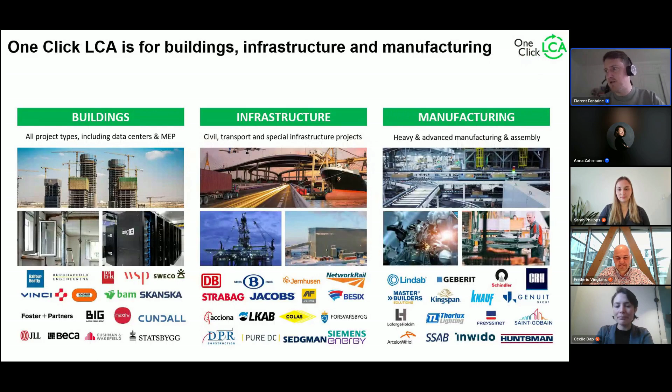So a few words about OneClick LCA. You should probably have heard about it, but we are a software company. We're focusing on building infrastructure and manufacturing LCA. We serve different types of customers across the industry. And the reason why we're here today is that life cycle assessment is getting traction all around Europe and the world.

To assess building environmental footprints, the main different drivers and reasons why to perform building LCA nowadays are basically regulations, certifications, and also buyer demands. We see in Europe in the coming years the EPBD, which will require performing building LCA for buildings larger than 1,000 square meters by 2028. This will be accompanied by regulations around product EPDs, but we also see a major increase in terms of certification and green certification schemes across the building industry. And LCBI, the Low Carbon Building Initiative, is one big initiative in Europe about it, and we'll speak about that today.

So how we basically at OneClick focus on measurement and improvement of sustainability on your project is that we deliver tools and software to assess environmental impact, carbon footprint at the different design stages of your buildings. I will not go into much more detail at the moment, but you can contact us if you want more information.

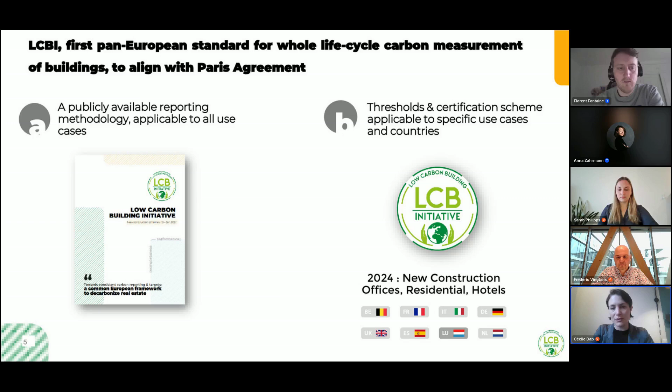So maybe in a few slides now, I'm going to go a bit into details on technically how the LCBI methodology works before letting the BPI team explain how they used LCBI. So globally, LCBI remains a carbon accounting methodology that we decided to base on 3 major criteria, linked with major European frameworks and standards that are being used. The 3 criteria are the following: we measure carbon footprint on embodied carbon, operational carbon, and biogenic carbon.

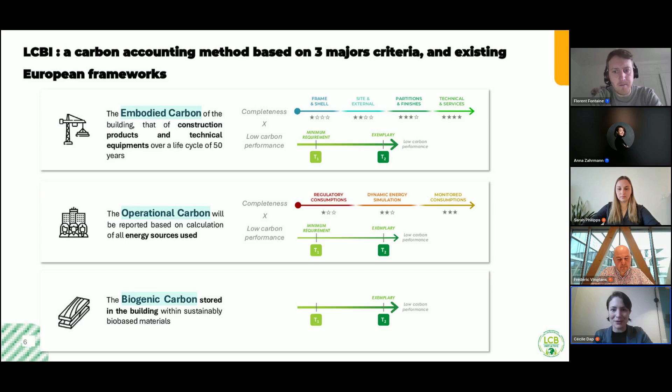Yes, so going further, and globally, as I was explaining, as much as possible during our work, we tried to align with existing standards and frameworks to make LCBI a support for real estate stakeholders to prepare before regulatory changes, and also to drive investment to low carbon buildings.

So on one side, we align with the taxonomy and the future EPBD requirements, for those who know them, because we are based mostly on the Level(s) reporting model, a reporting scheme from the European Commission. And then what we built has also been built in order to be able to use it as reporting data within the company for ESG reporting. So all the carbon footprint that you will be accounting through LCBI can be used internally as reporting data, and some companies are already using LCBI as a reporting scheme internally.

And in the end, the goal of LCBI, of course, is also, as you will be able to see, to highlight low carbon projects and to drive comparison of carbon footprint between projects, and thus drive investments to those projects that have the lowest carbon footprint.

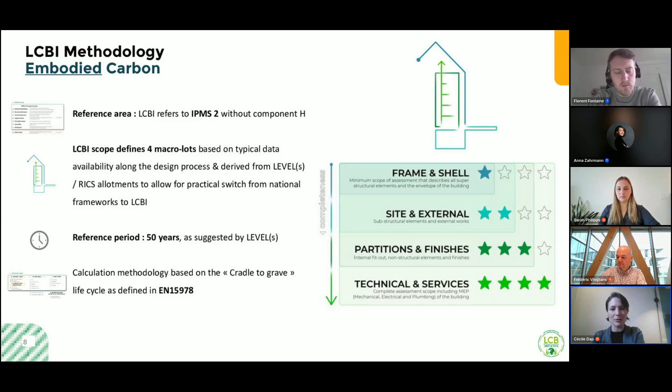So very briefly, maybe some details on each of the criteria. So on embodied carbon, maybe what's very specific about LCBI is that we defined 4 macro lots that you can see on the right, based on typical data availability along the project, and mostly based on the Level(s) and RICS reporting schemes. And this has been embedded into LCBI in order to allow for a very practical switch and bridge between national frameworks and LCBI. So this 4 stars allotment will be used during the LCBI reporting on the embodied carbon. Then we have also based it on the 50 years reference period, but you'll be able to see that later on.

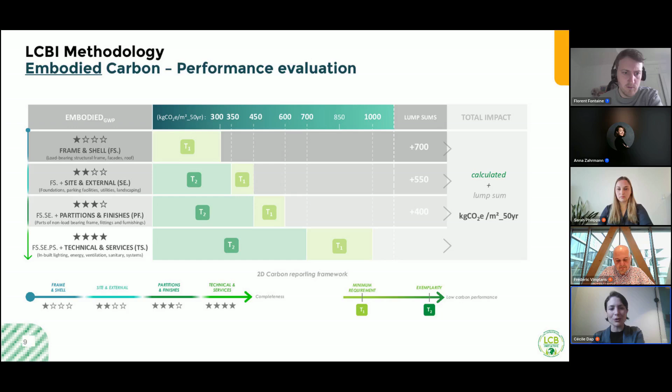Then the same kind of work on the operational carbon. We define several levels of preciseness to measure the final energy consumptions reported in kilowatt-hours. And then we use the emission factors proposed by CRREM to multiply those energy consumptions and get to a carbon footprint. So we have also different levels of preciseness as explained earlier.

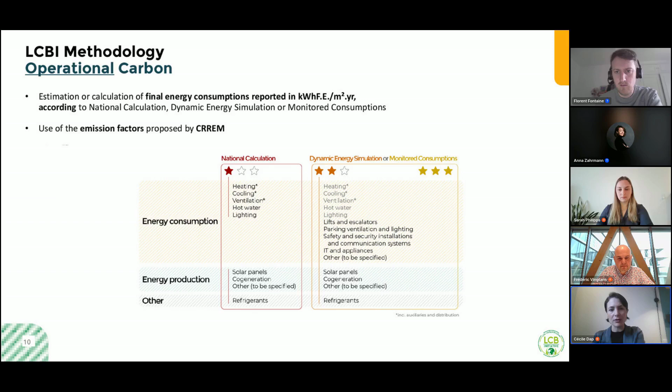And very briefly, carbon thresholds have been defined specifically for groups of countries, because in Europe, all countries don't have the same energy grid, and so have different emission factors. So this is why we have different thresholds in Europe. And last thing about those thresholds, they have been defined to be aligned with the CRREM pathways. So if you reach the LCBI thresholds on operational carbon, your assets should be aligned with the CRREM pathways.

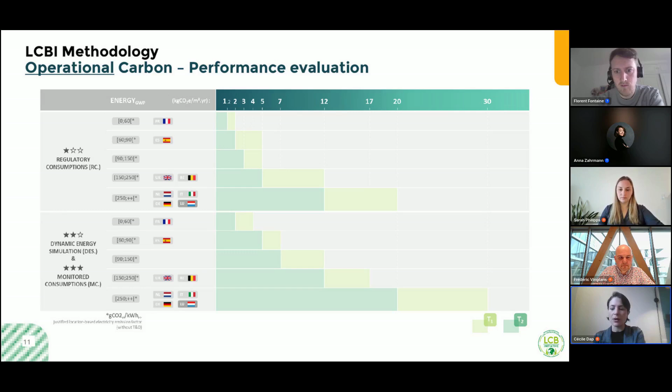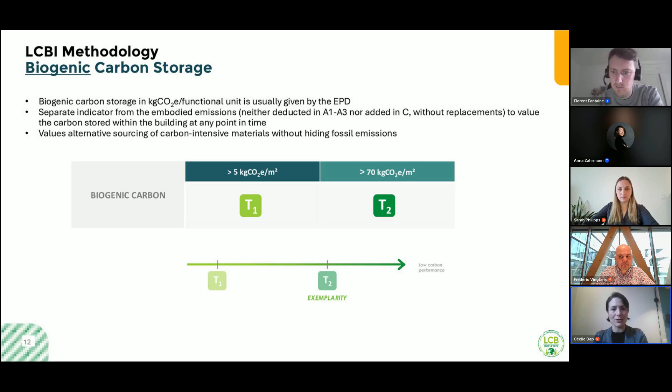And lastly, we also decided to value carbon storage in our buildings, because some buildings can also store some carbon according to the use of materials. So we have defined 2 levels of performance that you can reach in terms of carbon storage within your assets. And in the end, this combination of completeness and thresholds will give you access to different levels of the LCBI: standard, performance, or excellent certification. And this is what we will be able to see now with the Roots project, which has been our first certified building in Luxembourg, and also the first to reach the best level, excellent.

Thanks a lot, Cécile. Very, very insightful presentation, and I think all experts would agree that LCBI makes an outstanding work by associating the completeness and low carbon building performance, and also very clear and transparent how you make LCBI basically adapted to every country. So I think that was very insightful.

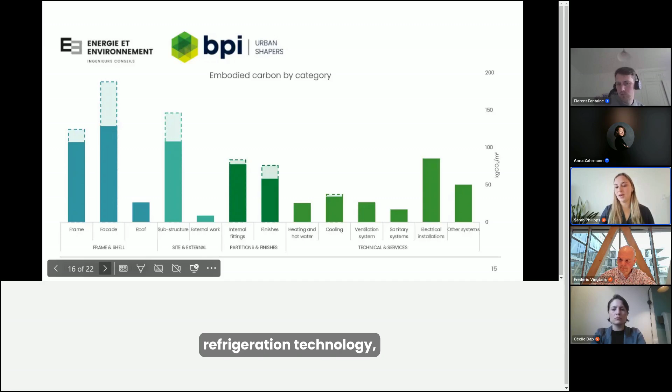Mais avant d'arriver à ça, pour le bâtiment, on était plus haut. Donc, en fait, on a vraiment fait des optimisations. Et comme le disait Frédéric, ces optimisations ont été faites en collaboration avec toutes les parties prenantes. Je vais rentrer un peu plus dans le détail, reprendre aussi des éléments que Frédéric a expliqué, voir concrètement comment ça se traduit au niveau des résultats. Donc, là, on voit les différentes optimisations sur les différents postes : structure, façade, sous-structure, les parachèvements intérieurs et également la technique avec le froid, mais on va y revenir.

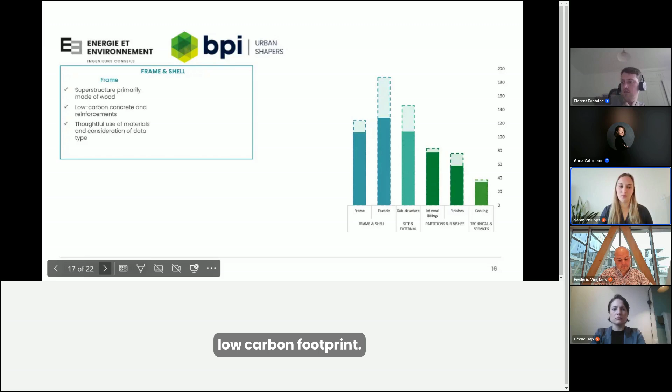Si je reprends tous ces éléments qui ont été optimisés et si on regarde point par point concrètement ce qui a été appliqué, on voit déjà que pour la partie superstructure et façade, la superstructure de base, ce n'est pas une optimisation mais un avantage du projet dès le départ. La superstructure est majoritairement constituée de bois. Et pour tous les éléments qui sont en béton armé, on est parti sur du béton à faible empreinte carbone et des armatures également à plus faible empreinte carbone. Un principe général, pas que sur la structure mais sur tout le projet, c'est vraiment l'usage raisonné des matériaux.

Donc, forcément, la diminution de l'empreinte carbone d'un bâtiment commence déjà par la diminution des quantités de matière. Il y a vraiment eu une réflexion qui a été faite tout au long du projet avec Frédéric et toutes les parties prenantes sur un usage raisonné des matériaux. On va le voir plus tard et Frédéric l'a déjà introduit avec les pieux.

Par rapport aux façades, de la même manière, il y a eu une réflexion, dont Frédéric a parlé, sur le ratio vitré. On avait une imposition, donc on est allé vraiment à la limite de cette imposition, mais justement en se rendant compte du poids des menuiseries et de l'impact sur tous les aspects d'avoir des façades vitrées. Il y a eu des enseignements qui ont été tirés pour chaque catégorie.

Et puis pour les profilés aluminium, on est parti sur des profilés en aluminium recyclé. Le fait d'avoir vraiment toutes les parties prenantes autour de la table, d'avoir l'entreprise, ça a permis d'avoir des retours directs sur la disponibilité des matériaux, sur les données disponibles avec les déclarations environnementales.

Pareil pour les protections solaires extérieures des menuiseries du projet : celles qui ont été sélectionnées disposeront d'une EPD. Cette collaboration nous a permis de nous renseigner sur la faisabilité, la disponibilité. Et sur les ancrages, il y a eu aussi un travail de réflexion sur la diminution des ancrages de bardage, pour avoir l'empreinte carbone la plus faible possible pour ce poste-là.

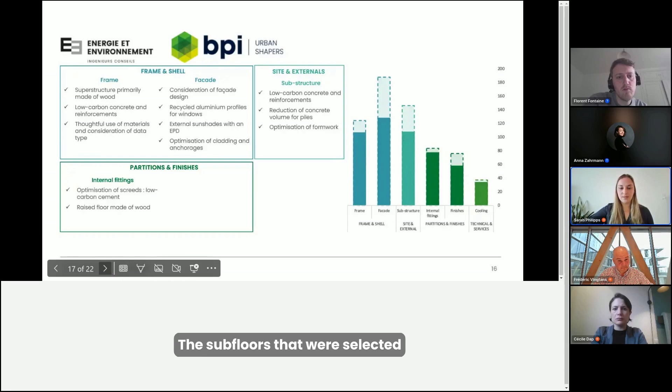Ensuite, pour la partie parachèvement, il y a une optimisation sur les chapes avec du ciment moins carboné. Les faux planchers sélectionnés sont des faux planchers bois agglomérés, plutôt qu'un standard qui serait plus en silicate. Il y a eu un choix fait à ce niveau-là aussi. Pour les revêtements de sol dans les bureaux, on a des moquettes qui ont une teneur en pneus recyclés.

Et enfin, les techniques. Premier point, l'encodage détaillé des techniques. C'est quelque chose qui nous a permis d'arriver jusqu'à 4 étoiles sur la cible carbone incorporée.

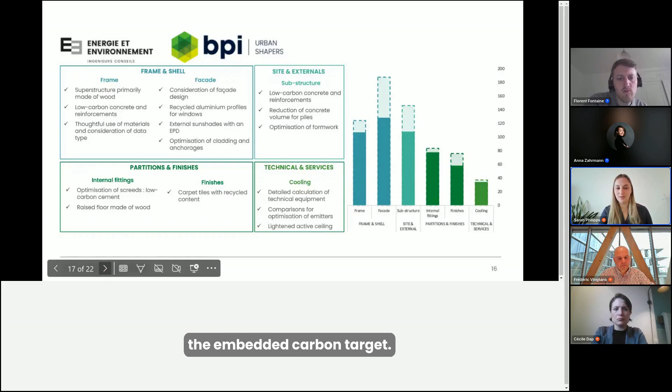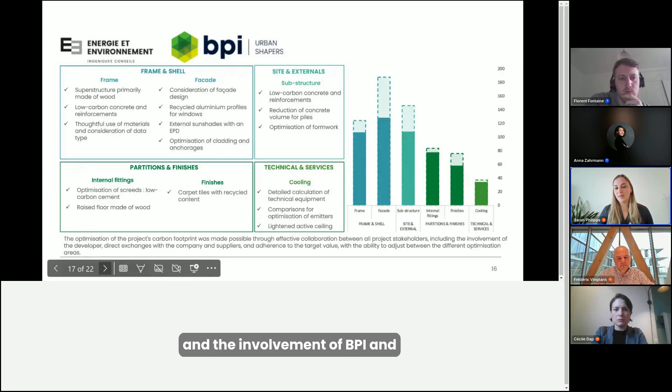Et il y a eu cette comparaison que Frédéric a expliquée sur les émetteurs. Et pour les plafonds, les îlots qui sont sélectionnés, c'est des îlots actifs allégés. Donc, en conclusion de tout ça, on a vraiment, sur chaque poste, eu des réflexions sur les optimisations, sur ce qu'il était possible de faire. Et c'est vraiment cette collaboration avec tous les acteurs autour de la table qui a permis d'arriver à ce résultat-là. Et l'implication vraiment de BPI, de Frédéric, dans cette démarche-là, a été vraiment moteur pour trouver toutes ces pistes d'optimisation.

Donc maintenant, je vais passer au carbone biogénique, donc le stockage de carbone biogénique au sein des matériaux biosourcés, principalement au sein du bois, sur le cycle de vie du bâtiment. On voit la répartition du stockage de carbone biogénique et on voit vraiment que la majorité du stockage se fait au sein des dalles, puisque c'est la majeure partie du volume de bois sur le projet. Et donc, on atteint une cible T2 sur le carbone biogénique, qu'on atteint assez largement, puisque le seuil est à 70, on est à 159 kg de CO2 par mètre carré.

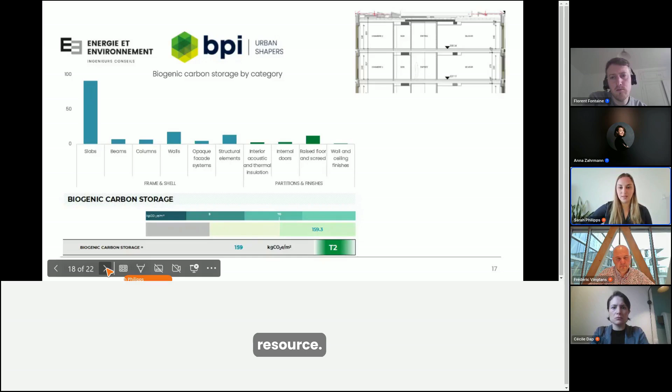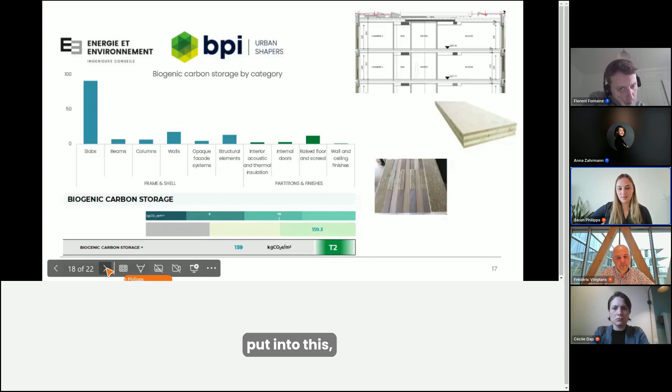Et donc, ce calcul-là, cette méthodologie, ça nous a fait nous questionner sur l'usage du bois et sur la limite de cette ressource, puisque le bois est une ressource limitée. Et donc, on a vraiment eu toute une réflexion sur l'usage du bois. Est-ce que c'est nécessaire d'en mettre autant? Est-ce qu'on ne pourrait pas substituer le bois par d'autres matériaux? Donc, il y a eu vraiment toute cette réflexion et des enseignements qui sont tirés puisque finalement, le bois est une ressource limitée et limiter son usage est essentiel.

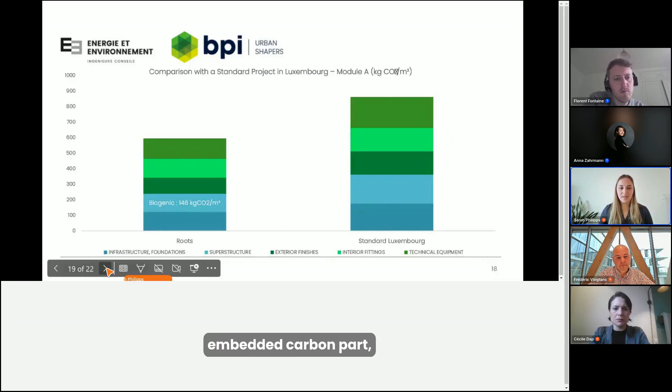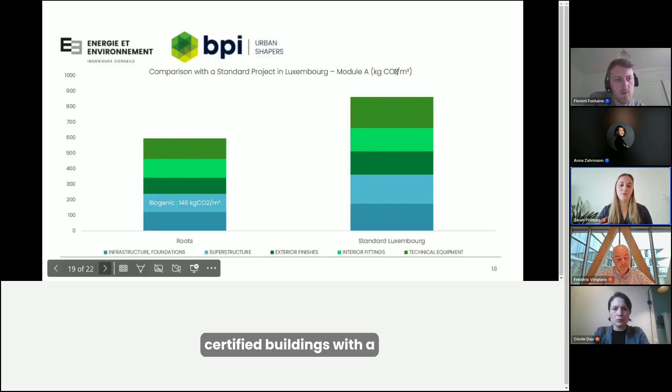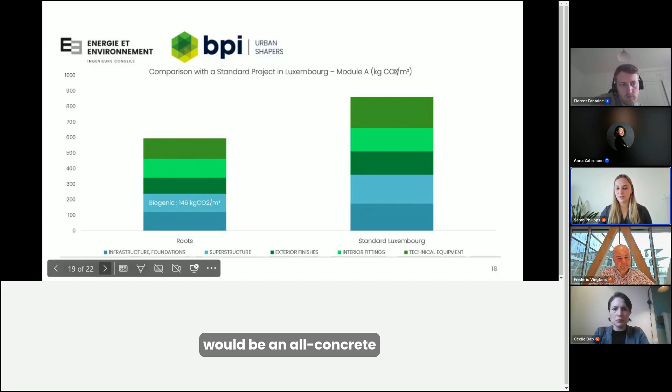Avant de passer à la partie carbone opérationnel, je voudrais juste faire une comparaison avec un bâtiment standard au Luxembourg. On l'a vu tout à l'heure, au Luxembourg, actuellement, il n'existe pas de réglementation, donc le calcul se fait sur une base volontaire. Et au bureau énergie et environnement, on a l'habitude de comparer les bâtiments qu'on certifie avec un standard au Luxembourg, un standard qui forcément va être amené à évoluer. Aujourd'hui, le bâtiment Roots, s'il était construit de manière standard au Luxembourg, ce serait un bâtiment tout en béton avec des matériaux standards.

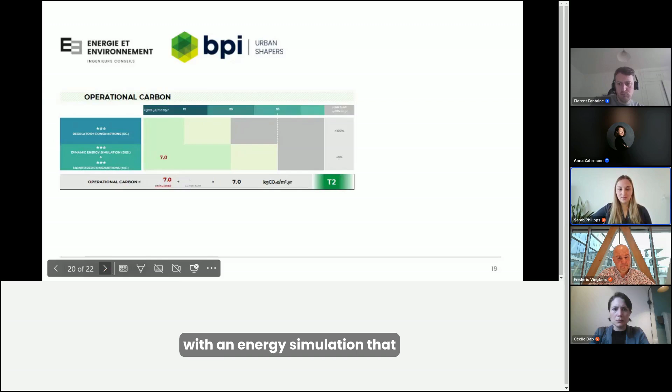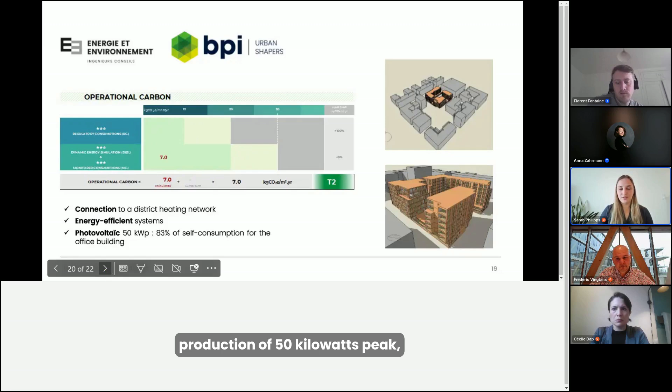Et donc, on voit ici que par rapport à ce standard, le projet Roots a une diminution de 31% de l'empreinte carbone sur le module A. Et enfin, je vais passer à la partie carbone opérationnel. Là aussi, pour le carbone opérationnel, on est allé sur 3 étoiles, avec une simulation énergétique qui a été faite pour le projet. Et donc ici, on atteint une cible T2, donc on est à 7 kg de CO2 par mètre carré par an. Ça s'explique par des systèmes énergétiquement performants, une connexion au réseau de chaleur et une production photovoltaïque de 50 kW crête, avec 83% d'autoconsommation pour le bâtiment de bureau.

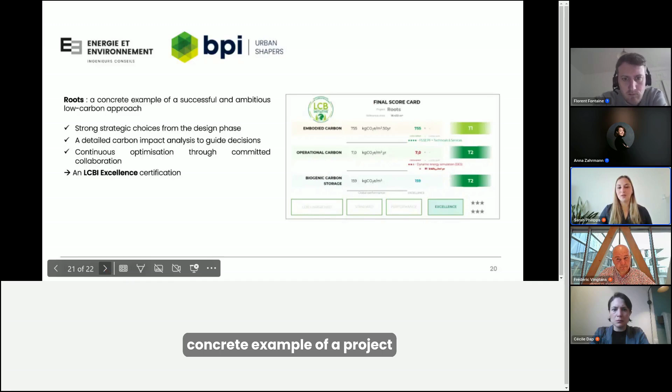Une petite conclusion avant de laisser la parole à Frédéric. Donc, conclusion de tous ces éléments dont on a discuté, c'est que le projet Roots, c'est vraiment un exemple concret de projet qui a été ambitieux dès le départ et réussi à l'issue. Donc ça, c'est vraiment grâce au fait d'avoir des choix qui ont été faits dès le départ, d'intégrer cette comptabilité carbone dès le départ au niveau de la conception et d'avoir aussi laissé cette liberté à l'entreprise de pouvoir faire des choix tant que la cible était respectée.

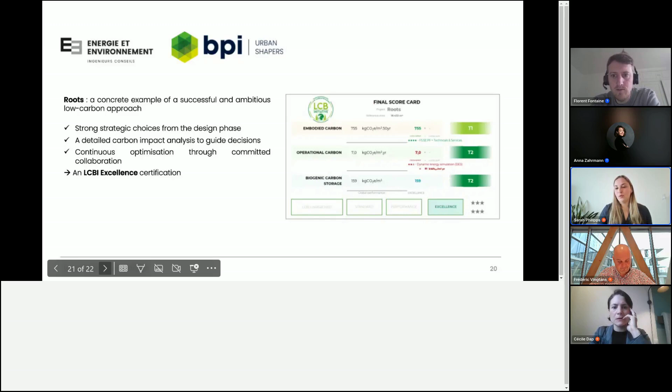Et ça, ça a été aussi facilité par le fait d'avoir l'entreprise directement autour de la table, de pouvoir avoir des échanges directs, d'avoir des propositions. Donc vraiment, cette démarche, ce processus, ça a impliqué toutes les parties prenantes. Et comme le disait Frédéric, c'est devenu un challenge qui a motivé vraiment toutes les personnes qui ont participé au projet. Donc, il y a vraiment une optimisation continue tout au long du projet. Et le projet, il y a eu des optimisations qui ont été cherchées sur chaque poste. Donc ce n'est pas seulement le fait que ce soit un projet en bois qui fait qu'il est performant. Il y a vraiment une réflexion sur chaque poste.

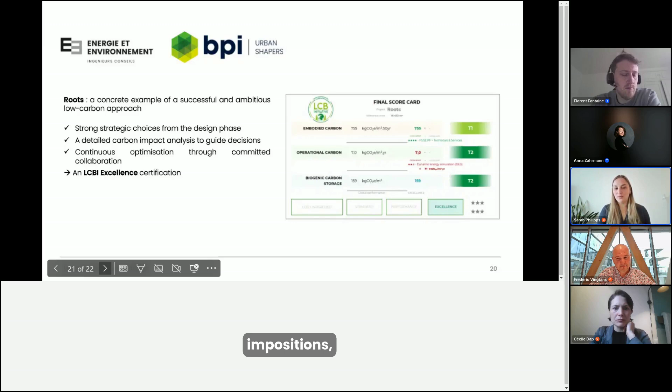Et ce qui est important aussi, c'est que ça nous a permis de tirer des enseignements. Donc, même si là, il y a eu certaines impositions, par exemple les ratios vitrés qui ont fait qu'on ne pouvait pas forcément aller plus loin, mais ce sont des enseignements qui sont tirés pour la suite et pour des futurs projets. Et donc, tout ça, ça a amené une certification LCBI Excellence. Voilà, je vous remercie et je laisse la parole à Frédéric pour la conclusion.

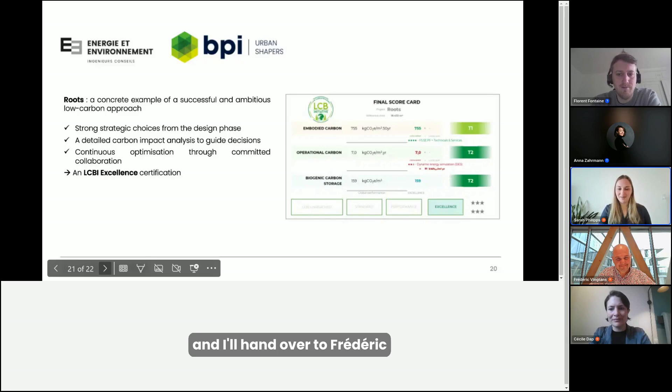Donc, pour conclure, je ne vais pas répéter ce qui a été dit. Quelles sont les bonnes pratiques à considérer au début des développements ? Je dirais, si je devais en résumer ça en quelques points.

Vérifiez vos gabarits, soyez vigilants aux gabarits urbanistiques. Souvent, les bâtiments sont conçus, ou en tout cas, les réflexions urbanistiques sont basées sur des bâtiments standards. Bien évidemment, on a encore peu de retours sur des bâtiments qui sont moins carbonés, mixtes ou bois. Et bien souvent, on rencontre des contraintes que l'on doit supporter tout au long du projet. Donc, intervenir dès la phase urbanistique et intégrer des gabarits qui permettent des constructions mixtes. On doit aller vers le mixte si on veut réduire notre empreinte carbone.

Puis, veillez aussi au rapport entre les surfaces d'infrastructure et les surfaces de superstructure. Limitez vos sous-sols. Pour ça, il y a plusieurs leviers, j'en citerai quelques-uns : agissez sur les stationnements, la réutilisation des sous-sols lorsqu'il existe des sous-sols de bonne qualité. Enfin, j'aurais envie de dire également un autre levier très important, c'est monitorer la compacité du bâtiment, surtout sur les bâtiments de bureaux où la façade peut avoir un poids important, et le ratio vitré aussi. Et intégrer vraiment cette comptabilité carbone, comme on l'appelait depuis le début.